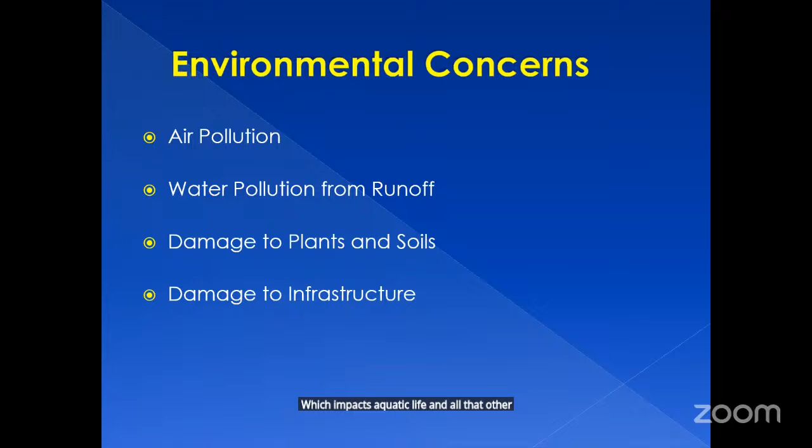Environmental concerns: chlorides, acetates, and abrasives placed on pavements during snow and ice control operations eventually end up in the natural environment. That's a fact. The accumulation of chlorides, acetates, and abrasives poses risks to public health, aquatic ecosystems, water quality, vegetation, and wildlife. Chlorides cause damage to infrastructure. I'm going to have some photos showing all this stuff.

The most common chemical used is sodium chloride, common rock salt. It's the least expensive out there. There are many alternatives, but sodium chloride is the least expensive, and that's what pretty much everybody uses, typically mixed with something else. Other chemicals used either alone or in combination with sodium chloride include calcium chloride, magnesium chloride, very common, and potassium acetate, which you would typically see used at airports because it's non-corrosive. Calcium magnesium acetate is another non-corrosive material, but expensive. Urea, and there's agricultural byproducts, which we will talk about a little bit.

Abrasives are not chemicals, but are used at times to improve traction and friction, trying to make the road like sandpaper. If you've lost it and got away from anti-icing, you can get snowpack on the road. So on hills and intersections, abrasives can improve the friction for vehicles.

Give them a better chance to stop. In the United States, approximately 10 to 25 million tons of sodium chloride is used annually, depending on winter conditions. This is from the National Research Council. I'm sure you can find this on the internet.

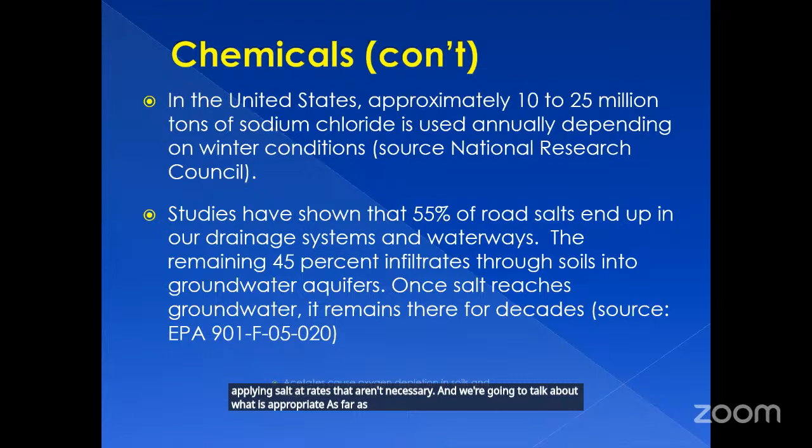Acetates cause oxygen depletion in soils and water. Use of dry abrasives for snow and ice control has very little value other than improving the friction. So if you get snowpack or ice and you want to improve the friction, you can put abrasives down. Others try to cut through that snowpack or ice by applying salt, because now you're in a de-icing situation versus anti-icing, and we're going to get into how much additional salt it takes to de-ice versus anti-ice.

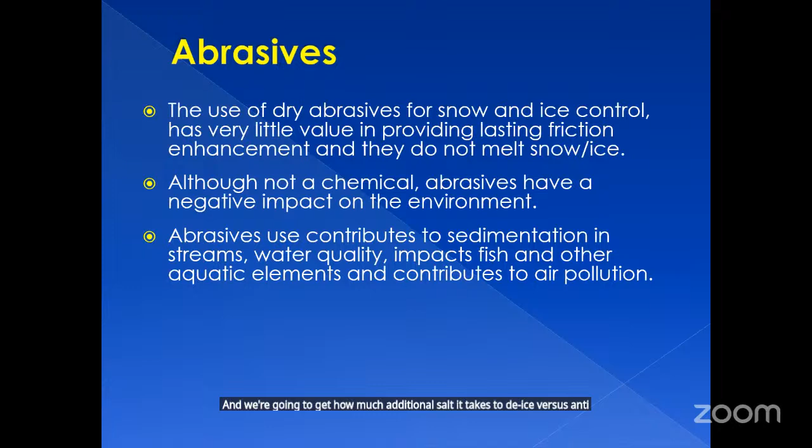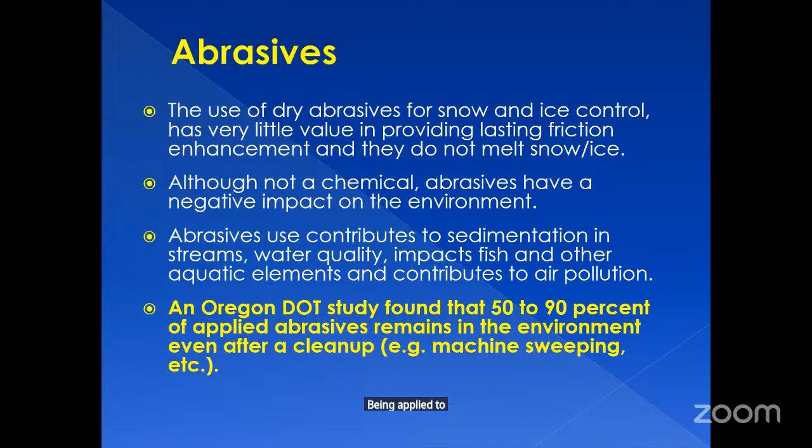We'll get into that. An Oregon DOT study found that 50 to 90% of applied abrasives, this is sand, remains in the environment even after cleanup. That's why if you're near culverts, if you look down in the waterway as you cross over, you often see little sandbars and things like that. A lot of that is from the abrasives applied to roadways. Not as much today, but in the past, abrasives were heavily used.

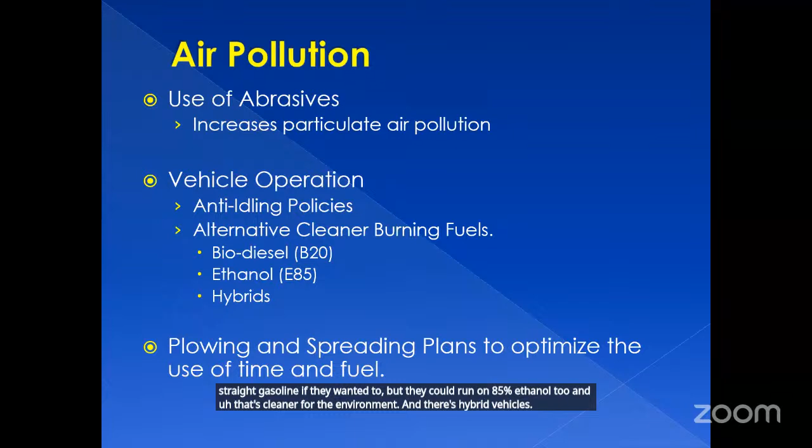Abrasives cause air pollution. There are things we can do to reduce air pollution: anti-idling policies, alternative cleaner burning fuels, use biodiesel, ethanol, E85. When I was with Hamilton, I wrote a green fleet policy, so everything they had to buy had to be something that burned cleaner fuel. We were using a lot of ethanol, which is 85% ethanol and 15% gasoline, and these flex fuel vehicles could run on any amount, they could run on straight gasoline if they wanted, but they could run on 85% ethanol too, and that's cleaner for the environment. There's also hybrid vehicles, and plowing and spreading plans to optimize the use of time and fuel.

Water pollution: a 2009 study by University of Minnesota. This is where we are now, and it's getting worse every single year. If you're driving down the road after a storm, you'll see a lot of the roads will just be white, especially the state highways. And if you look at the shoulders, you'll find loose chlorides that never went into solution. That ends up at some point migrating off into your drainage system and can be very harmful to aquatic life. Now in some cases, you're even getting the effects of tasting it in some of the drinking water. So I kind of covered that.

Other things that are used in salt are anti-caking agents. Some of these anti-caking agents, like Prussian blue and yellow prussiate, actually contain cyanide. There's agricultural byproducts that can be added to salt, which we're going to talk about, because some of these are very, very effective at making liquids last longer and work better, like if you're pre-treating your roads. Sugar beet juice is a very common one. We'll get into that a little bit.

So, equipment washing. For those of you involved in snow and ice control, in the old days you'd pull your trucks in after a storm and just wash them all down. All the salt water would just come out and go find a storm drain. And that's not a good thing.

So when you wash your vehicles, a lot of agencies now are actually putting in vehicle wash stations. You put your vehicle in the wash station, and everything gets recycled. The water gets recycled, doesn't go into the storm drain system. I even think they recapture the salt that gets washed off. Hamilton has a truck wash station, and they allow other towns to come and use it.

Otherwise, you should do things to prevent any water from getting into storm drains, using socks - those big environmental socks, whatever you can get - but it shouldn't be allowed to go into the storm drain system. It's going directly into waterways.

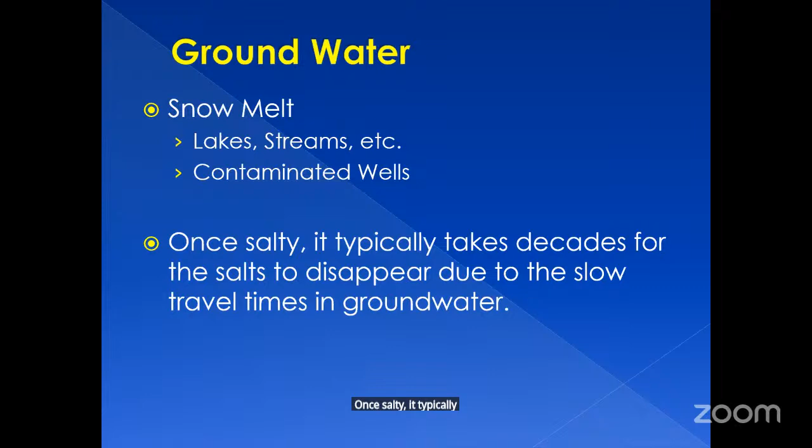Salt solutions can disturb water uptake of roots and cells and leaves. Salt spray can dry out leaves. Most damage occurs within 30 to 50 feet of the road. Susceptibility to damage by salt varies significantly among plant species. So a lot of agencies are finding a way to put in salt tolerant species, but the bottom line is there's still all that salt going over there.

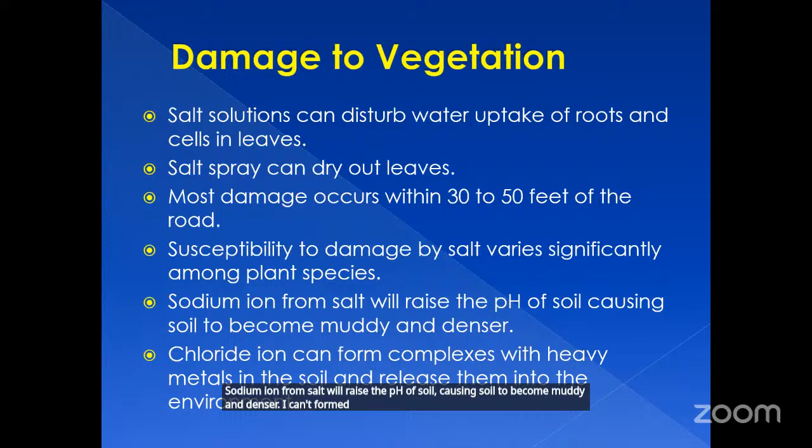A sodium ion from salt will raise the pH of soil, causing soil to become muddy and denser. Chloride ion forms complexes with heavy metals in the soil and releases them into the environment.

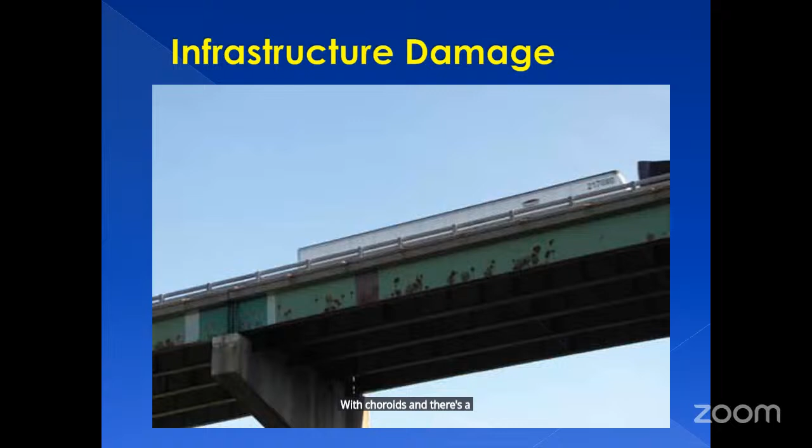Now, infrastructure damage from chlorides - not directly related to water, but this damage to infrastructure is significant with chlorides, and there's a lot of reasons for that. Here's just one example where you can see the bridge paint is rusting, the steel is rusting.

The United States Environmental Protection Agency estimates that for every ton of salt costing $50 - now that number's old, typical salt like pre-treated salt, if you were to buy Clear Lane or something, that's somewhere around $75 a ton if you buy it off a state contract - approximately $750 in damage to infrastructure. So that would be more on the lines of like $1,000 damage, and that includes concrete and vehicles and all those things.

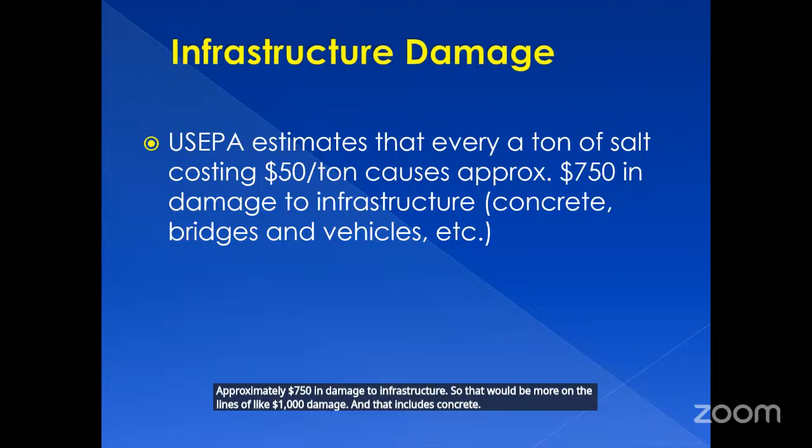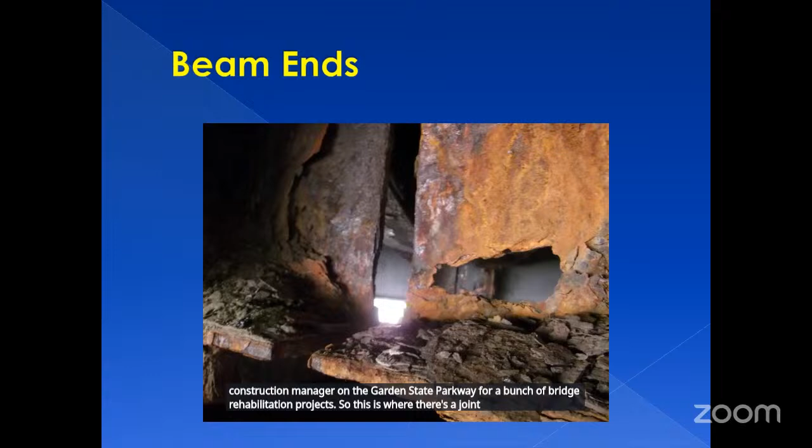Here's a photo I took. I was a construction manager on the Garden State Parkway for a bunch of bridge rehabilitation projects. This is where there's a joint in the bridge, and the joint was not properly sealed or functioning properly, so all the water and chlorides that got on the bridge leached down and got onto these beams. Here's a beam with a hole in it, and you can see the amount of rust and steel that has dropped down onto the flange of the beam.

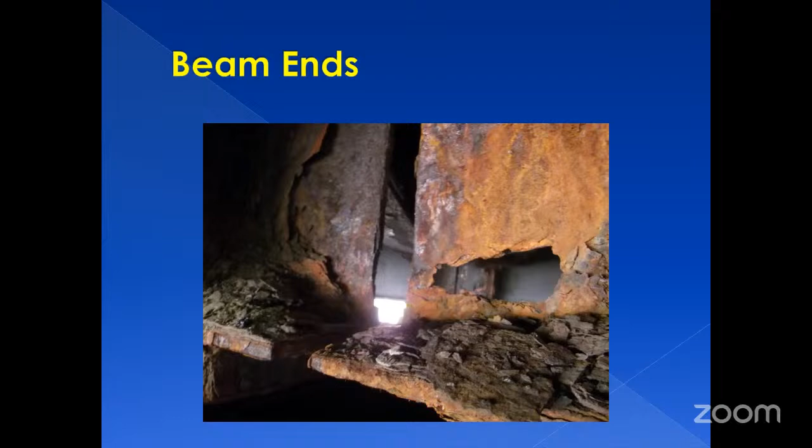What can we do to minimize the environmental impacts of winter operations? Well, you can develop a winter operations management plan. This is where we establish levels of service for different types of roadways, and develop specific route-by-route snow and ice control plowing and spreading plans. If you have a plan to spread your roads at a specific frequency, you can maintain an anti-icing policy throughout the storm. That means having a route-by-route plowing and spreading plan in place, so everybody knows exactly what they're expected to do and how long it's going to take.

Incorporate technologies such as automated vehicle location systems, geographic information systems, and infrared mobile thermometers. Infrared mobile thermometers tell you what the pavement temperature is, and that is a critical piece of information for you to use if you're going to maintain an anti-icing policy.

For example, when I was with Hamilton Township, we had infrared mobile thermometers and pavement temperature specific weather forecasts, and other agencies were out there spreading material down for a storm. We didn't spread 1 grain of salt. The reason was because we knew that the pavement temperatures were above freezing and weren't going to go below freezing. So we didn't do anything. The snow landed on the road, the snow melted, and that was it. We didn't apply a single grain of salt. And that happened more than once.

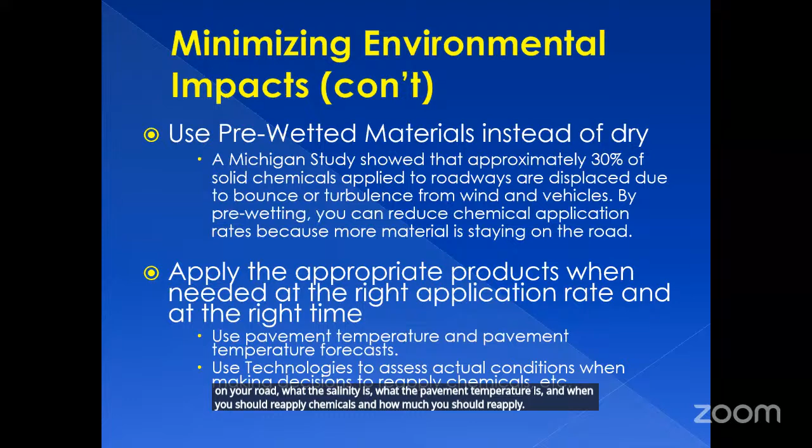Monitor operations and application rates. When I started with the township, I was following a truck and estimated they were putting down more than 800 pounds per lane mile of salt. There were reasons for that: either the driver felt more was better and he had control, more was better, and also the equipment wasn't properly calibrated.

So calibration is very, very important. Make sure you calibrate your spreaders. If you want to put down 300 pounds per lane mile, you're going to put down 300 pounds per lane mile, not 800 pounds per lane mile or 100 pounds per lane mile.

Calibration is extremely important. We're going to talk a little bit about maintenance decision support systems. This takes some of the decisions and makes them more systematic and consistent. It can always be changed, but it's a system that gives you guidance based on the information available, whether weather forecasts, precipitation intensity, pavement temperature, etc. As for equipment, use state-of-the-art spreader controls.

There are spreaders out there, and most of these spreaders are now very intelligent. They collect and store the data—application rates and all those things—and you can get access to that data through various means. Zero velocity spreaders have the actual spreader part lower to the road, which minimizes bounce.

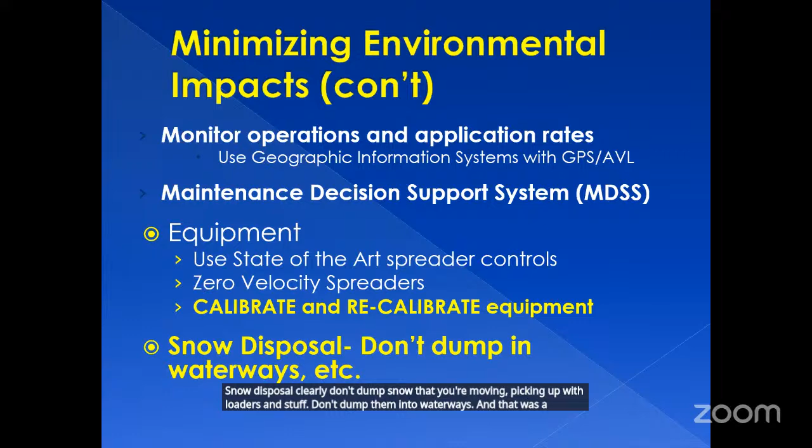Minimize the use of abrasives. Abrasives have to be in your toolbox, but there's no reason to use them unless it's to create a sandpaper situation—typically on hills where you're no longer in an anti-icing situation and you've got pack or ice. You try to improve friction, but abrasives have no melting ability and should not be used very often.

Anti-icing, extremely important. That's what everybody should be doing.

Housekeeping—washing equipment, already covered that. Make sure that you don't allow the wash runoff from your washing activities to go into the storm drains.

Salt storage—make sure your salt's covered, and make sure there's doors or shields on the front so salt can't migrate out of the building.

Personnel training is extremely important. For those of you in the industry, there are many training certification programs out there—you can go through SIMA, the Snow and Ice Management Association, or the American Public Works Association, which has a snow supervisor certification program. Your staff gets trained in how they should handle snow and ice control operations and what's the most effective way to do it. There's nothing better than having your staff certified.

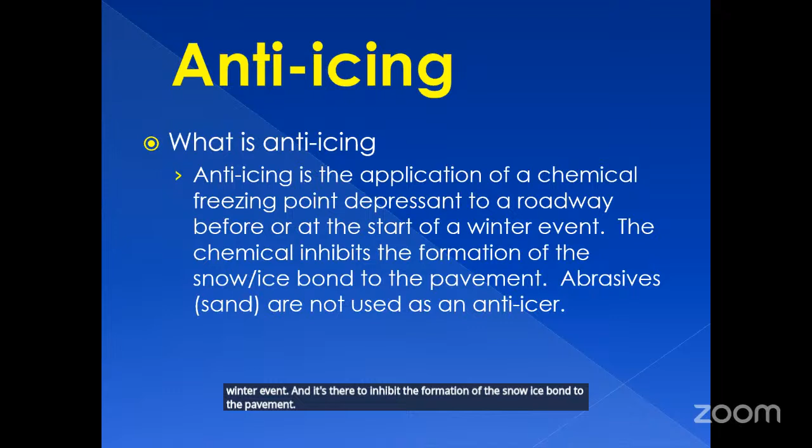So what is anti-icing? Anti-icing is the application of a chemical freezing point depressant to a roadway before or at the start of a winter event, to inhibit the formation of the snow-ice bond to the pavement. That's what everybody should be doing.

Anti-icing prevents the snow and ice from bonding to the pavement. It's a proactive approach. De-icing is applying chemical after you already have snowpack and ice, so it's a reactive thing. Studies have shown that it can take 4 to 8 times more salt to de-ice than anti-ice.

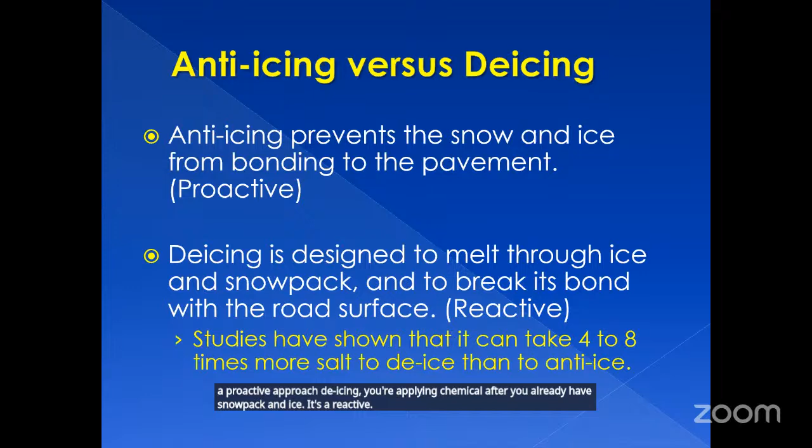Anti-icing can provide a higher level of service, keep snow in a plowable condition, and can provide bare pavement during the storm. At a minimum, anti-icing results in achieving bare pavement at the fastest possible rate at the end of a storm. So if you're anti-icing, once the storm's over all you've got to do is come out there with your plows and push it off.

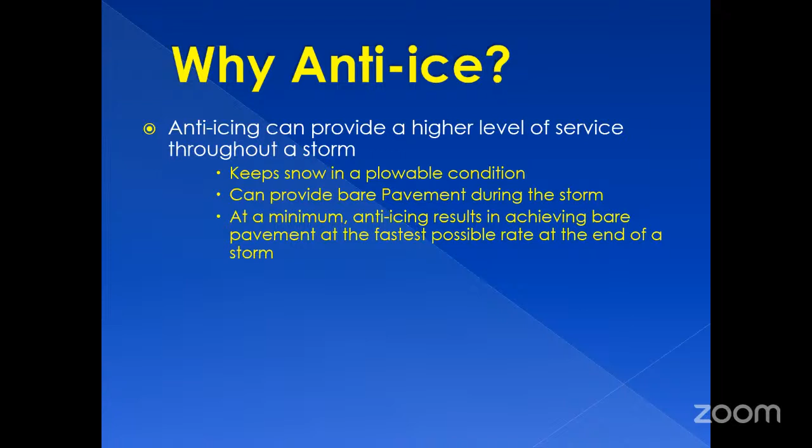It's a very, very good thing. And here's that cost benefit of 11 to 1. These aren't my numbers, this is easily accessible over the internet.

Anti-icing with liquids. So just about everyone is using liquid applications, and they pre-treat their roads ahead of a storm. You can either use salt brine or salt brine blended with other chemicals. Roads, bridges, hills, critical intersections are all great places to do this anti-icing with liquids.

An important part about this is clearly knowing what the weather forecast is, because you don't want to anti-ice pre-treat the roads ahead of a storm if the storm's going to start out as rain, because it's just going to wash away. You don't want to do this if there's just a low probability of snow and ice.

So there's a lot of things to look at here, but it is your first spread. It's going to save you if you do this anti-icing, applying before the storm. It's not critical to have your staff in immediately before the storm starts, because you've already got your first spread down. So it's also an insurance policy, and it can absolutely cut down on the amount of overtime involved.

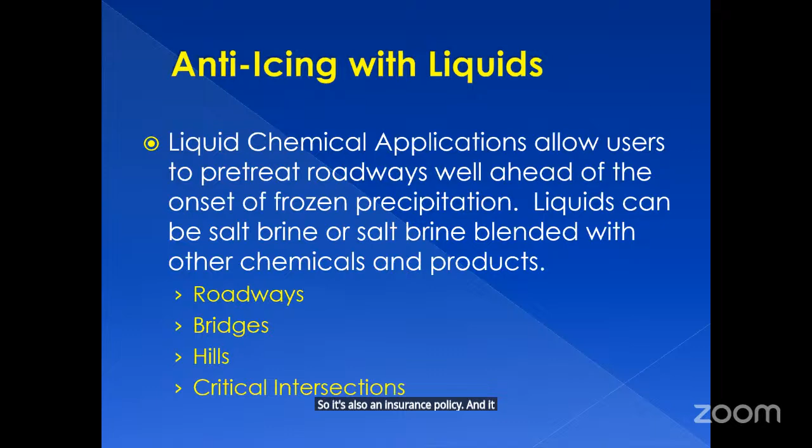So liquids that you can put down are sodium chloride, calcium chloride, magnesium chloride. I've also used potassium acetate when I was at the state doing some research. And then agricultural byproducts, such as from sugar beet and corn, are also used.

And they act as cryoprotectants, these agricultural byproducts, because although they have no melting ability, when you put your brine down they help the brine stay on the road longer, and slow down the formation of ice crystals in the liquid as the temperatures drop and the brine gets diluted. So it's a money saver, it improves performance, and it's a natural anti-corrosive.

Sodium chloride has become the liquid brine of choice for pre-treating highways and roads due to availability and cost. And as for mixing, I'll get into that a little bit, but you can mix chemicals with your brine, like calcium chloride and magnesium chloride, to provide a lower freezing point.

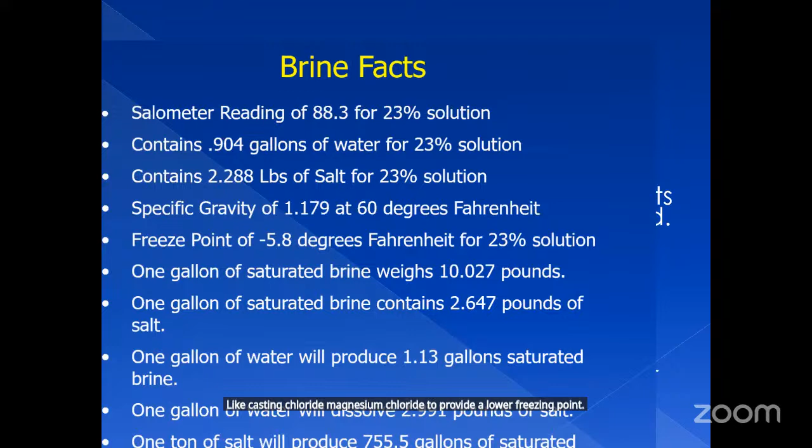So just some brine facts. I'm not going to go over too much of this stuff here, it's just for your information only.

Pre-wetting accelerates solids going into solution. So if you put down salt in a storm where the temperature's 20 degrees and you're just using plain salt, for example, it's going to take a long time for that to go into solution because of the coldness, and when you've got cold air, you've got dry air. If you pre-wet those solids, that acts as an accelerant to help get the salt into solution and make it work. Salt, as everyone should know, does absolutely nothing until it becomes a liquid.

So the salt just sitting on the road does nothing, it's got to become a liquid. Pre-wetting can significantly reduce chemical application rates because more salt is staying on the road, and because it's going into solution quicker.

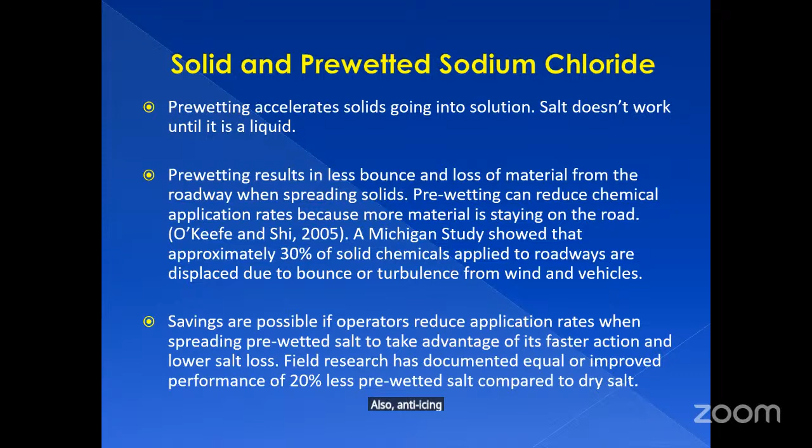Also, anti-icing has been proven to significantly reduce the amounts of accidents involved in snow and ice control.

Technologies and regulations: electronic ground speed controlled spreaders. So if you're riding down the road applying 300 pounds per lane mile, and you slow down or speed up, the application is automatically adjusted based on your speed.

Zero velocity spreaders, talked about that earlier - it's where the spreader is actually closer to the road, so you get lower, less bounce. A lot of agencies are also using rubber plow blades.

Recycling equipment, wash water, covered that. Not going to get into snow fences, I could be here for an hour just talking about that.

Anybody who knows anything about snow fences should know that the fence itself should not be sitting on the ground - it should be roughly 6 to 8 inches off the ground. There have been studies done to show that that's the best way to have drifting stay near the snow fence and not actually blow out closer to the road.

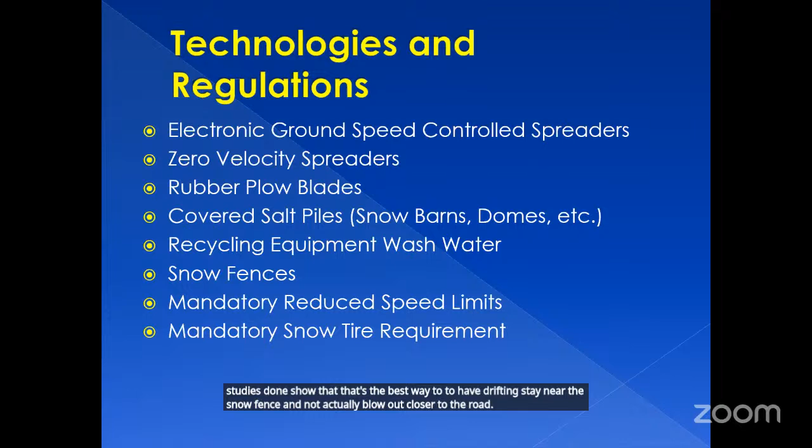Some agencies, I think Massachusetts was one, have no salt zones where you can't apply salt, so you have to look at different types of alternatives. There are different chemicals that are decent for the environment.

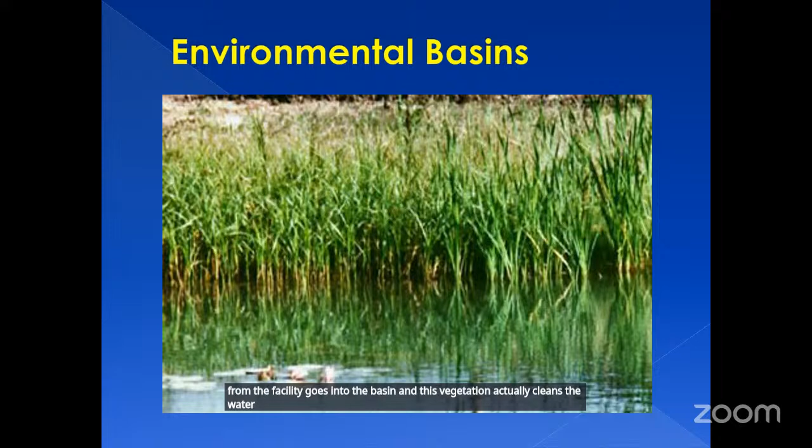Decision making is extremely important, knowing what the weather forecasts are: start and end times, pavement, ambient, and dew point temperatures, intensity, precipitation, the type of precipitation, and what you're going to do with winds.

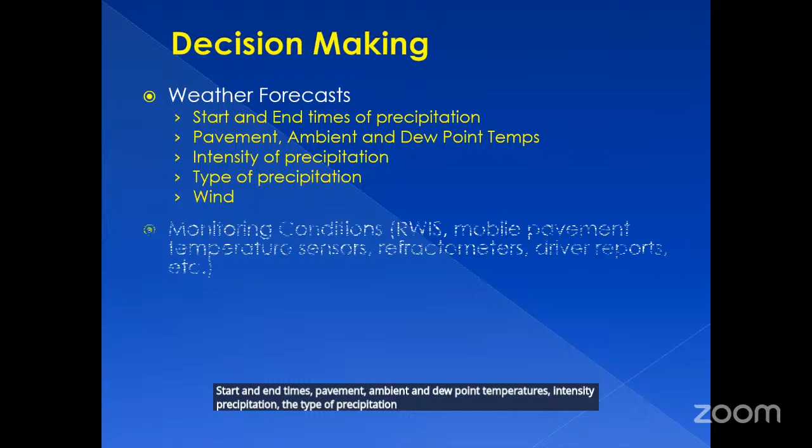Monitoring the conditions - if you're a state, you may have access to road weather information systems. If not, or if you're everybody, you should have mobile pavement temperature sensors in your vehicles so you can monitor what the pavement temperatures are. There's no reason to put chemicals down if the pavement temperature is 40 degrees.

Refractometers - that's something we're going to get into a little bit, how you can use refractometers to help you decide when to reapply chemicals. You take a couple drops of liquid off the roadway, put it in the refractometer, and it'll tell you what the salinity of the brine is. If you know that and the pavement temperature, that gives you an intelligent way of determining whether to reapply chemicals. Sounds a little complicated.

It's not. Every one of my crews in Hamilton had a refractometer. They cost a few hundred dollars a piece.

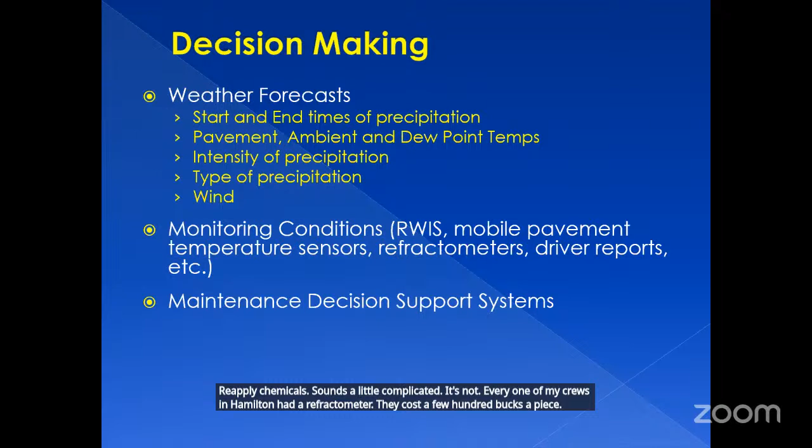Maintenance decision support systems - that's a system where all this information gets pulled in, and then it will recommend to you what you should do, as far as how much you should put down, the material you should put down, that type of thing. It's based on the storm event type, precipitation intensity, all those things.

Everybody should know exactly what they're expected to do - how much material to put down, all those things. You shouldn't be having a truck out there just bombs away. Everybody should know here's what is expected.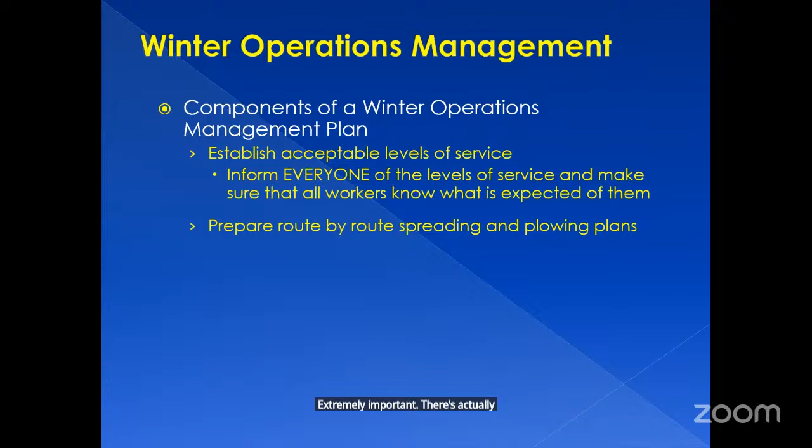Prepare route by route spreading and plowing plans - went over that a little bit. Extremely important, there's actually software out there now. I think some of the companies, like the waste removal companies, do that so they can get their waste picked up as quickly as possible, so they have optimized the routes that these trucks travel.

We can do the same thing for spreading and plowing, and it can be, and it does get set up, so that when vehicles are down and not available, it adjusts the plan automatically based on what equipment you have available and the size of the trucks, etc.

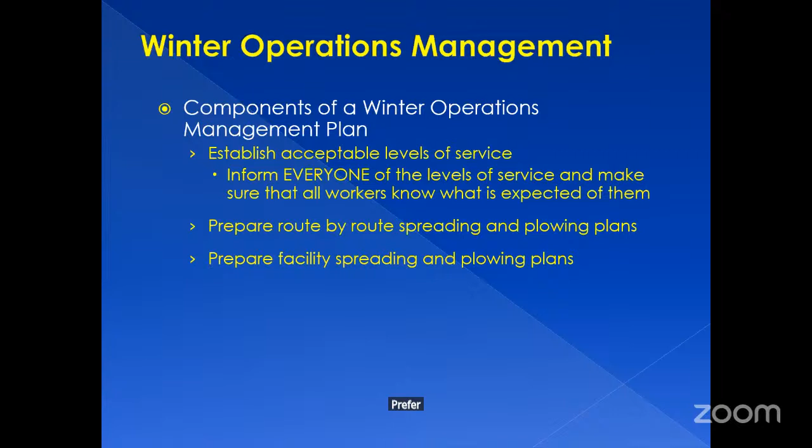Prepare facility spreading and plowing plans - this is to deal with parking lots and sidewalks and all that other stuff.

Determine resource requirements - this is where it gets a little complicated. When you're determining what you need to really effectively do snow and ice control, how much equipment and that type of stuff. You've obviously got to get money from your town or state to buy stuff. I could spend hours just talking about this, but it's important to do that - what do you need to get the job done?

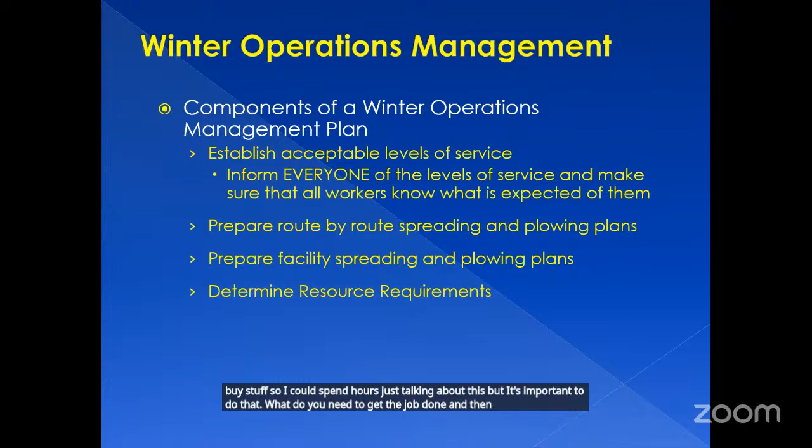And then echo that to upper management. If you can't get the equipment, then you have to adjust your plan so that you do it with whatever you have available.

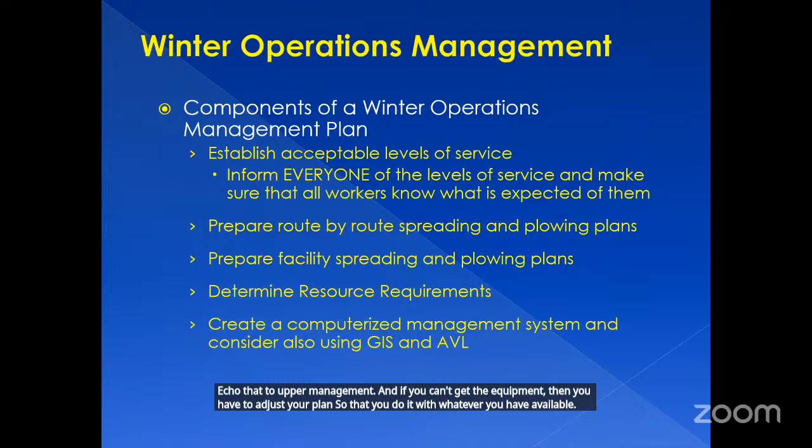A computerized maintenance management system, and consider also using GIS and AVL. Extremely important as far as I'm concerned. I'm going to show you some photos of stuff in a second.

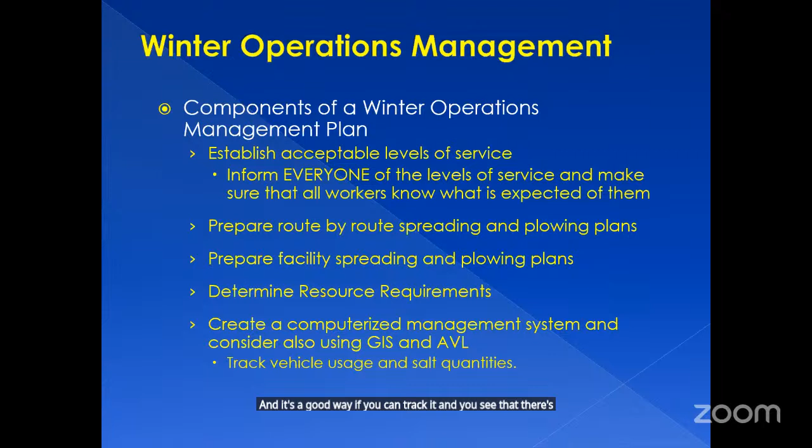Track vehicle usage and salt quantities - it's good to know where your vehicles are, what they're going to be doing, and how much material they're actually putting down, and record all that information. It's a good way, if you can track it and you see that there are certain vehicles putting way too much material down, you're able to talk to the driver and educate them, that type of thing.

Establish a communication system.

Use an operations center. I don't know how many people are doing that, but I know pretty much all the states use that, where they have people staffing a center and they're able to track operations and what's going on.

Decision-making tools, forecast, extremely important. If you have access to RWIS, road weather information system, that's an automated weather station out on the road. There's pavement temperatures, wind speed, precipitation intensity, all of that stuff is being captured. And if you're a town where everybody's paying taxes, you can often convince the state to give you access to their road weather information system. Now it's not your road, but you can still see what the weather's doing there.

You can use the pavement temperature stuff, but obviously everything as far as how much chemicals are there and things is really not going to be useful. But you can reach out to your state and very well could get access to RWIS. I know when I went with Hamilton after the state, I had access to the NJDOT RWIS sites.

Equipment and personnel readiness, that should happen year round. Public relations and public education, very important that the public knows what you're going to be doing. Pre-storm strategy meetings and post-storm strategy assessments, a requirement in the plan.

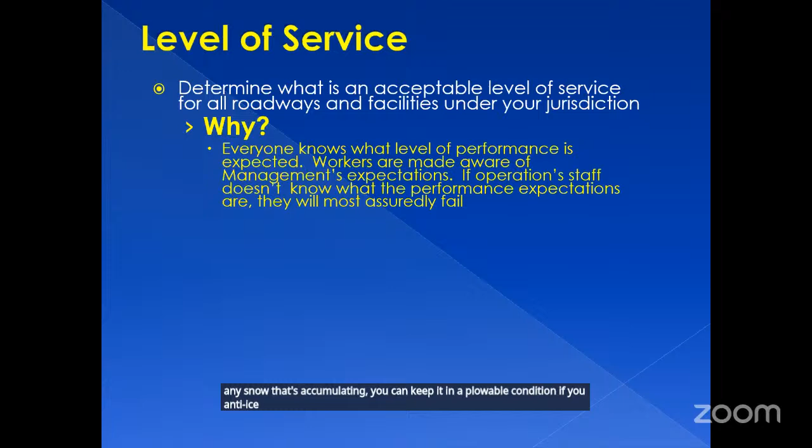Levels of service. So what's expected, and this is where everybody needs to know. There should be primary roads and secondary roads. The primaries, which get the most traffic, are obviously the most important. So what is your level of service for primaries? Is it to try to maintain a bare pavement throughout the storm? Sometimes you can, sometimes you can't, but at the minimum, any snow that's accumulating, you can keep it in a plowable condition if you anti-ice. But it's important everybody knows the levels of service for different roads.

So roads can be classified in many ways. In my town, we did primary and secondary. The secondary were the neighborhood roads, the primary were the main roads, and often the main roads going into developments, so you easily could get emergency vehicles in and out.

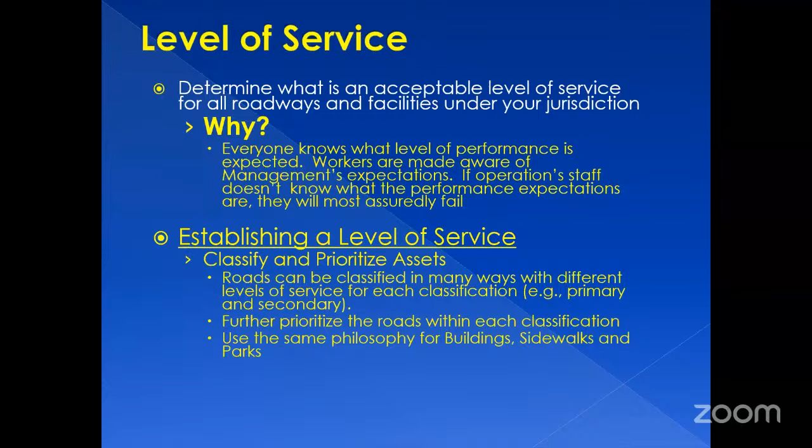And you could use that same philosophy for buildings, sidewalks, and parks. So obviously the mayor's office is going to be a priority over a park. And that was just an example of that.

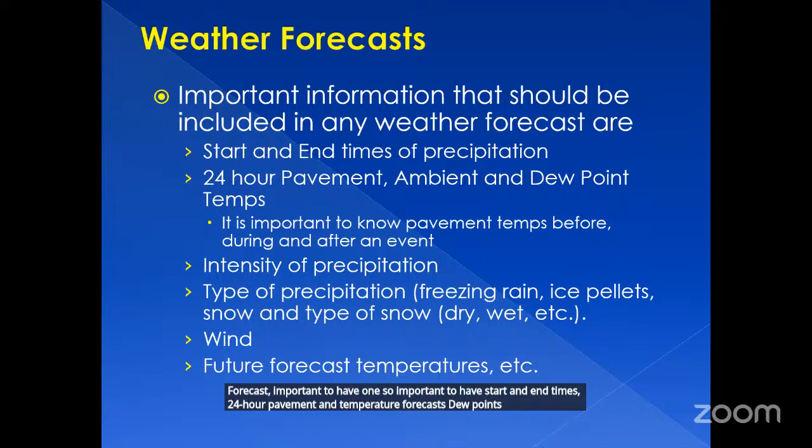Forecast, important to have start and end times, 24-hour pavement temperature forecasts, dew points. You want to know if there's going to be condensation forming on your bridge decks, and what's going to happen after the storm, or what the temperature's going to do. So here's an example of a 24-hour, or close to that, pavement temperature forecast, which includes ambient pavement temperature, all those types of things.

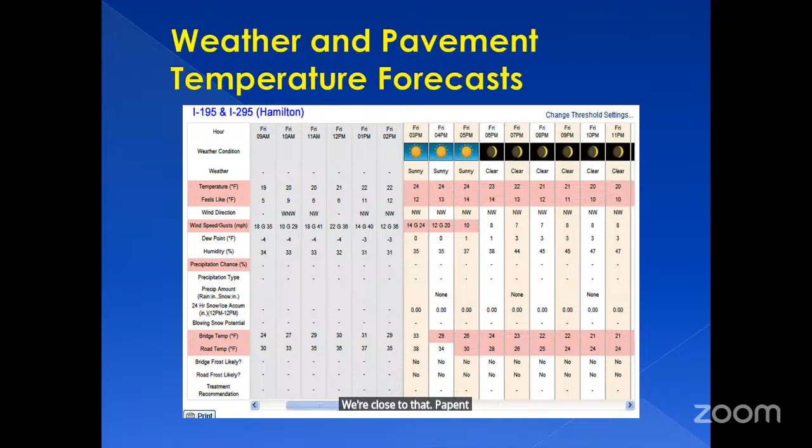How do you decide when to apply or reapply chemicals? For many it's just intuitive. You apply chemicals and then you come back out and say, okay, it's been a little while, let me put more down. That's intuitive. Some people are really good at that, others aren't. Lapsed time since the last application: if you apply salt and now a certain amount of time has gone by, you could just say okay, it's time to go back down and reapply. Again, intuitive.

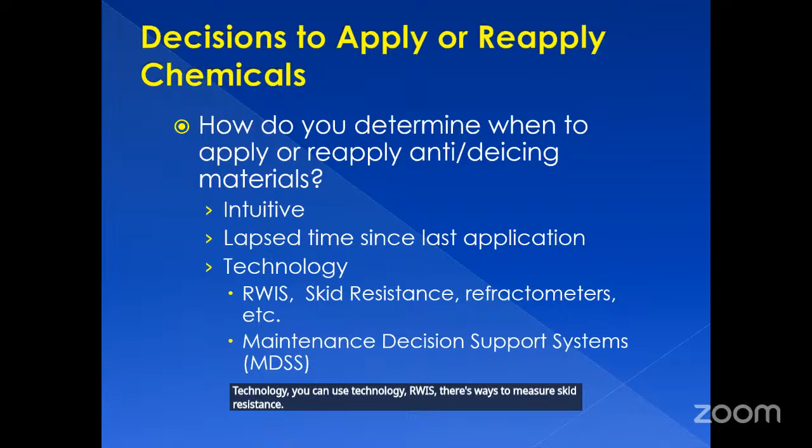Technology, you can use technology. RWIS, there's ways to measure skid resistance, refractometers, which I talked about a little bit, and maintenance decision support systems.

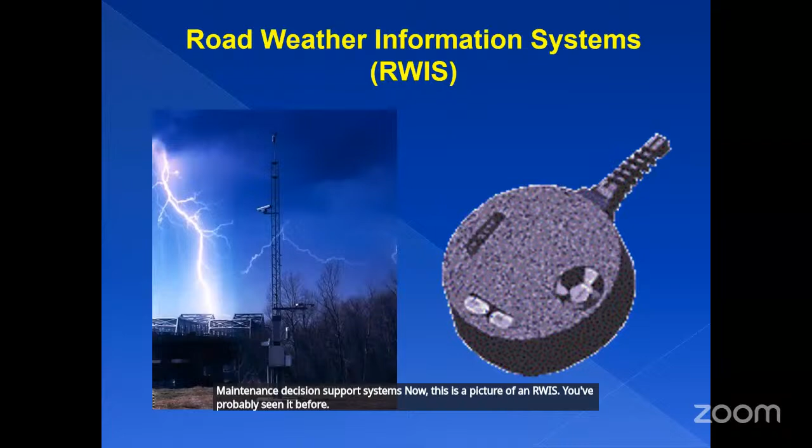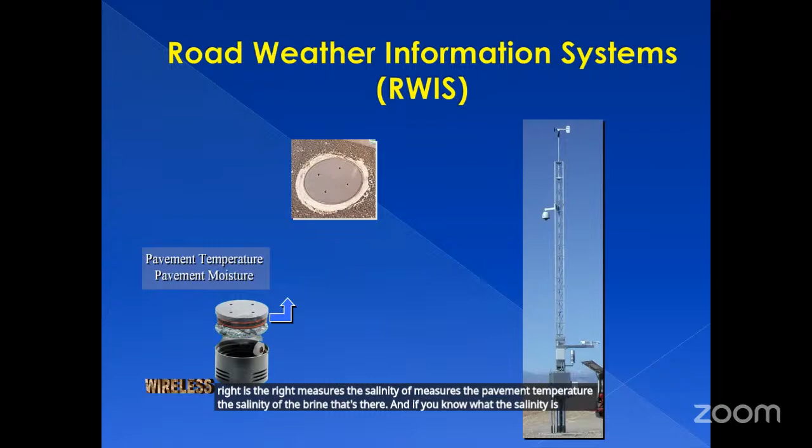Now, this is a picture of an RWIS. You've probably seen it before. You got a weather tower with a weather station. Here the sensor on the right measures the pavement temperature and the salinity of the brine that's there. If you know what the salinity is and what the pavement temperature is, you can determine if you need to reapply chemicals.

I'm going to say this again: there's nothing more important to you if you're involved in snow and ice control operations than knowing what the pavement temperature is. If it's below freezing and you've got precipitation, you're going to need to do something. If it's not below freezing, any material you put down is a waste—the snow's going to melt, everything gets diluted, it just washes away. So it's very, very important to know the surface temperature. These devices are relatively inexpensive. Every vehicle in Hamilton, in my town—pickup trucks, loaders we use for plowing, dump trucks—all of them had these devices in them.

This is a refractometer. If you want to see what the salinity is of the brine on the road, you just pull over, take an eyedropper full of material, put it in that little cup, close the lid, push a button, and it will tell you what the salinity is. Knowing the salinity and the pavement temperature, you can determine whether you need to reapply chemicals.

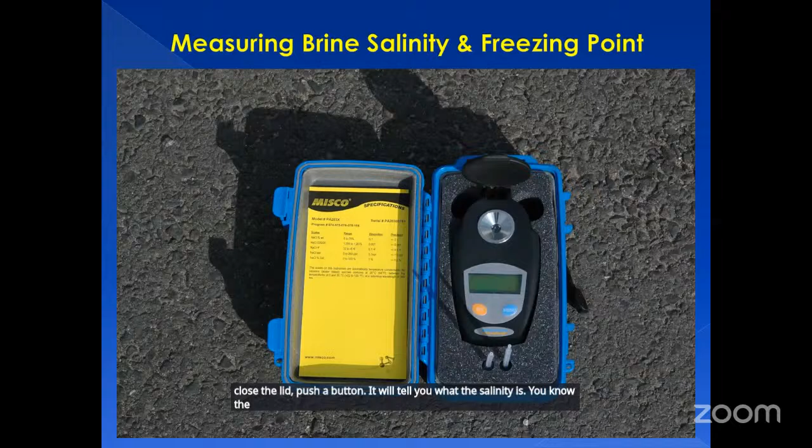This is a skid resistance device. I don't know anybody that uses this, but you can also determine when to reapply chemicals based on the skid resistance.

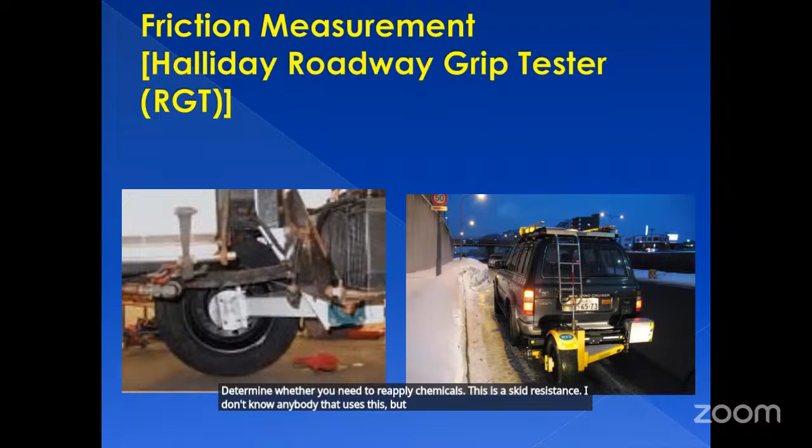Maintenance decision support systems take your forecast information and information you've been inputting, and tell you what you should do, or suggest what you should do.

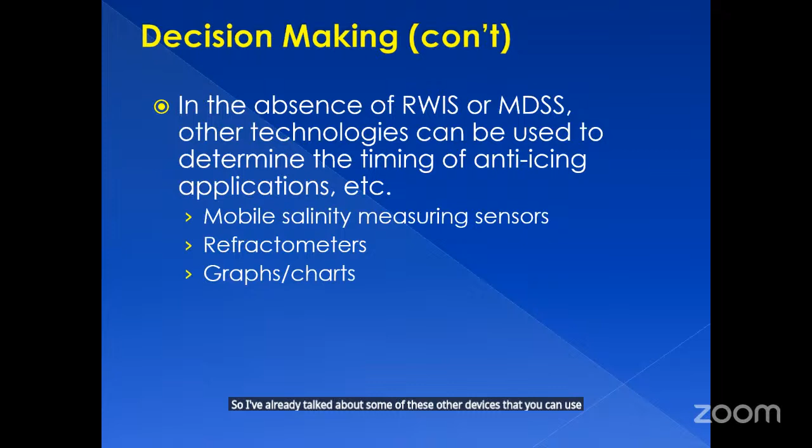I've already talked about some of these other devices that help you determine when to reapply chemicals and take it out of pure intuitiveness. There's all types of technology out there. Anti-ice will work until the eutectic temperature of the solution meets the pavement surface temperature. So when you anti-ice, it's important to know the salinity and the pavement temperature, because if it gets too diluted, it's going to refreeze. Refreezing occurs when the ice control chemical dilutes and melting stops at a given surface temperature.

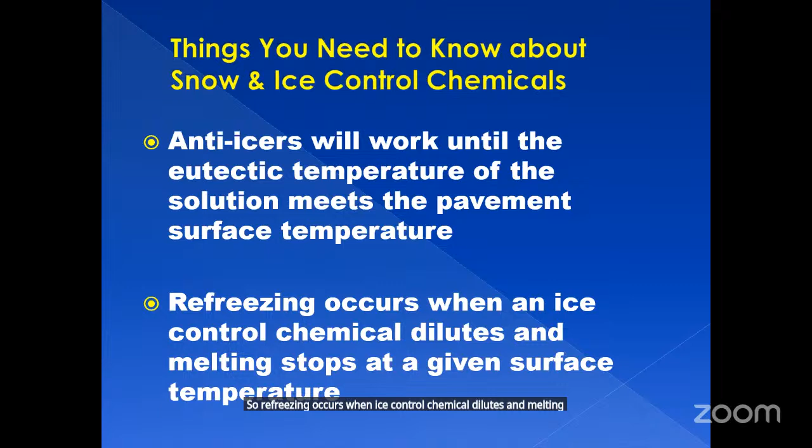Again, some of this is technical and I could go on for a long time. I'm absolutely open to it if anybody needs to contact me later about this.

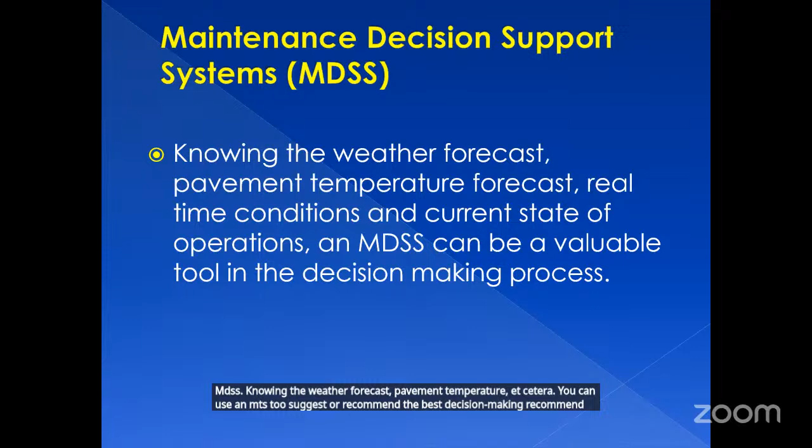MDSS uses knowledge of the weather forecast, pavement temperature, etc., to suggest or recommend the best decisions you should be making with regards to the storm. You can also use graphs to determine when to reapply chemicals. I've used this before we got into major technology, and it gets you away from the intuitive stuff and gives you a more educated way to make a decision.

Salt brine application guidelines: you can use MDSS to determine the type of storm expected, what the pavement temperatures are going to be, and what you should do.

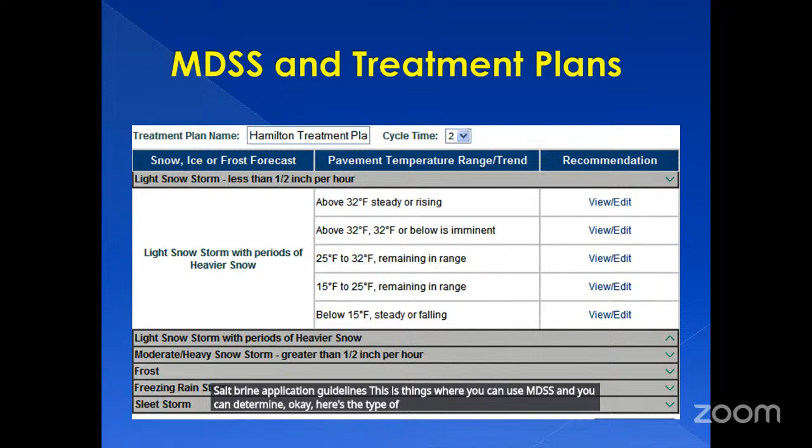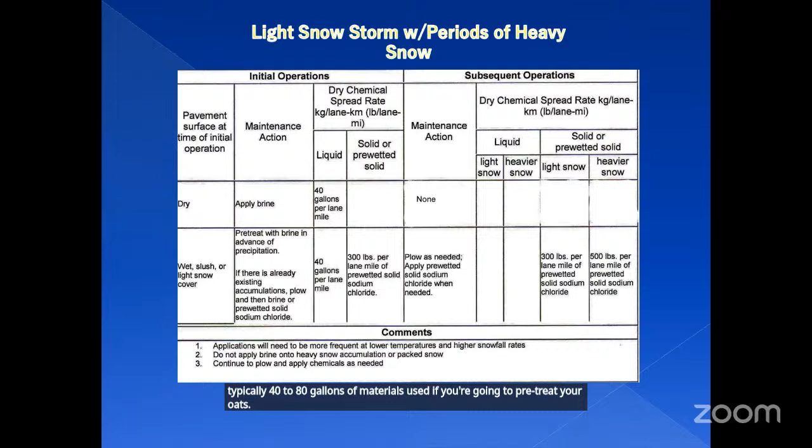Application rates depend on your equipment, but typically 40 to 80 gallons of material is used if you're going to pre-treat your roads. There are different rates depending on the storm type, as far as reapplying solids after the brine. Here's another example of a weather forecast with pavement temperatures, etc.

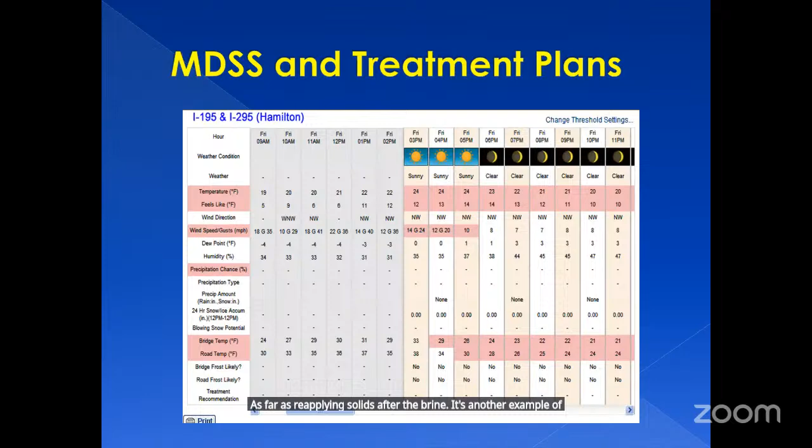Equipment readiness—I won't go through this in too much detail, but spreader calibration is extremely important. You shouldn't be putting down 800 pounds per mile when you really only want to put down 300. This is old information, but Hamilton Township calibrated all of its spreading equipment twice during the 2004-2005 winter. That winter, Hamilton received more events and 6 inches more snow than the previous winter, and we saved $160,000 in salt compared to that previous winter. There are all kinds of other factors that go into this, but this is a fact.

In winter operations in 2005, we developed this winter operation geographical information system. This system allows us to track our progress in fighting winter events. You can see every single plow that's out there on the roads—whether the plow is in the up or down position, how much liquids and solids they're applying, what the ambient temperature is, what the pavement temperature is. Very important in my opinion, and there are all kinds of ways to do this at a relatively minimal cost.

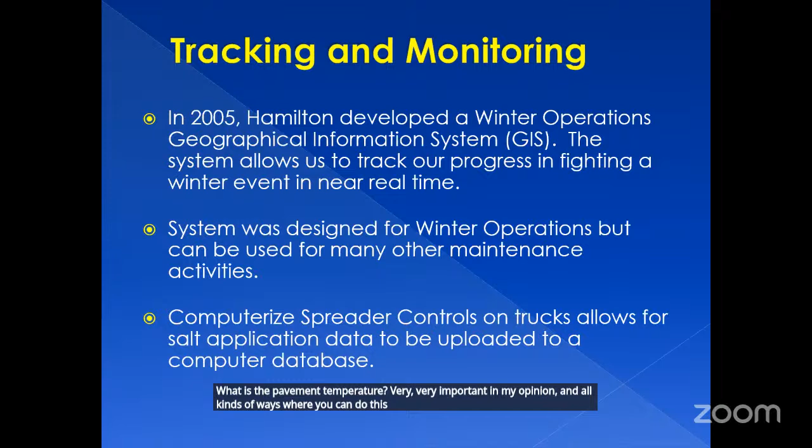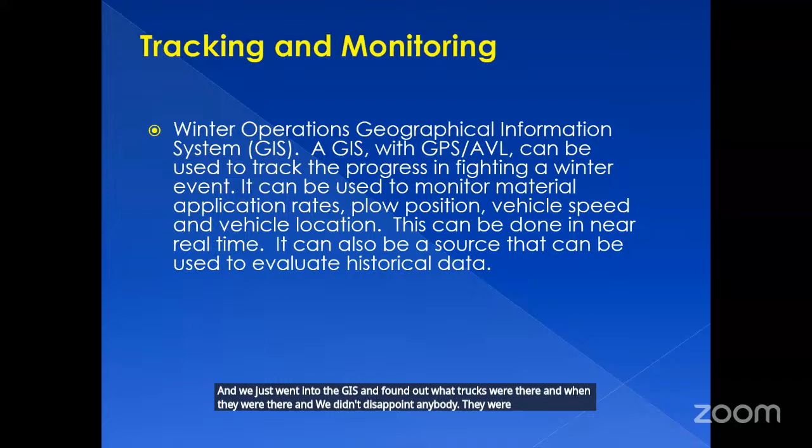So it also tells you vehicle speed and all that other stuff, and gives you a breadcrumb trail of what the vehicle did afterwards. We had a complaint, there were 13 mailboxes taken down on one road, and we just went into the GIS and found out what trucks were there and when they were there. We didn't discipline anybody, they were just going too fast during a heavy snow, so we had a little chat with them and that was it. But you can get all kinds of information from this.

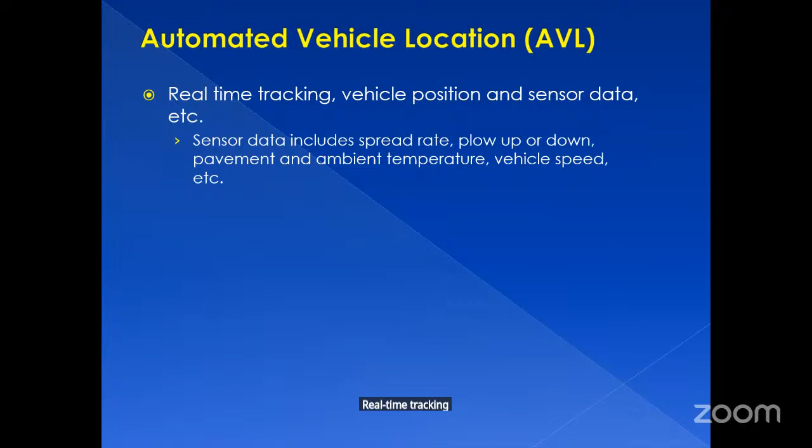Real-time tracking, all kinds of sensor data. You can also set red flags up, so if any truck spreads over a certain amount of material, it will notify you that this truck is spreading 500 pounds per lane mile. And if they're going faster than they should, it can also alert you of that.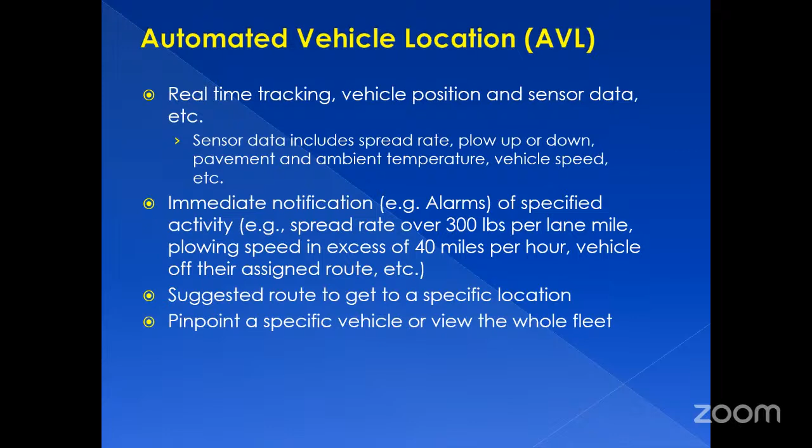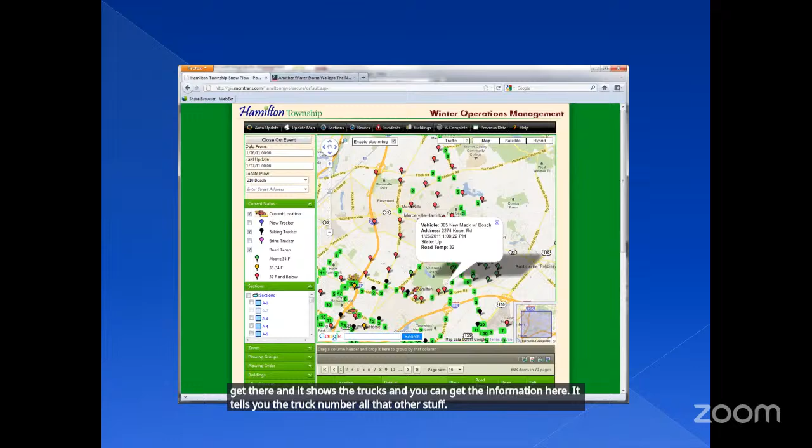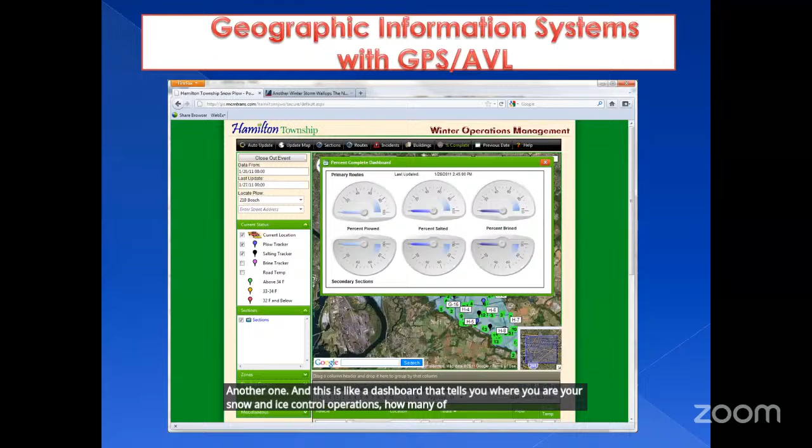This is Hamilton's Operations Center. These are just some maps that you get there, and it shows the trucks, and you can get information here. It tells you the truck number, all that other stuff. And this is like a dashboard that tells you where you are in your snow and ice control operations, how many of your roads have been spread, how many have been plowed, and what's remaining to do.

And then training, very, very important. I love snow rodeos. This is at our ecological facility that we use to train trucks on. In the summer, new employees can come in here and we spread mulch out and they can plow the mulch.

So this is in the old days, you see the wheels on this plow, it's an old plow. Today, the plow just rests straight on the roadway. That's what everybody should be doing. The plow should be directly on the road, removing as much dilution potential as possible. That'll keep you in an anti-icing situation and reduce the amount of salt you use.

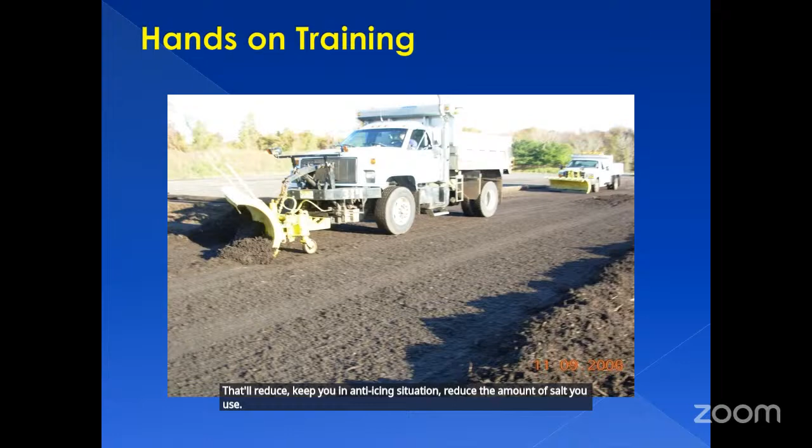Snow rodeos are an absolute blast. I don't know if you've ever done any, but this is an obstacle course where the vehicle goes through the cones, and you have a barrel push at the end, and there's all kinds of stuff.

So you can reduce, if you follow an optimal plan, the amount of time it takes you to spread and plow your roads. If you have an optimum roadway spreading and plowing plan, you can significantly reduce the amount of time it takes to get the work done. Like I said at the top, it was taking 3 hours or more to spread all primary roads in Hamilton. By following a detailed plan, we cut it to an hour and a half.

Significant. And if you can follow those cycles, it typically means you're going to be using less salt, because you're not getting that buildup of snow, and you're keeping it in a plowable condition. Plowing also saw a significant difference, from 10 to 12 hours at the plowing point, we cut it to almost 6. Secondary roads, prior to the plan, it was taking 36 hours or more to plow all of the secondary township roads. Using a plowing plan, everything was done within 24 hours. This is the neighborhood roads.

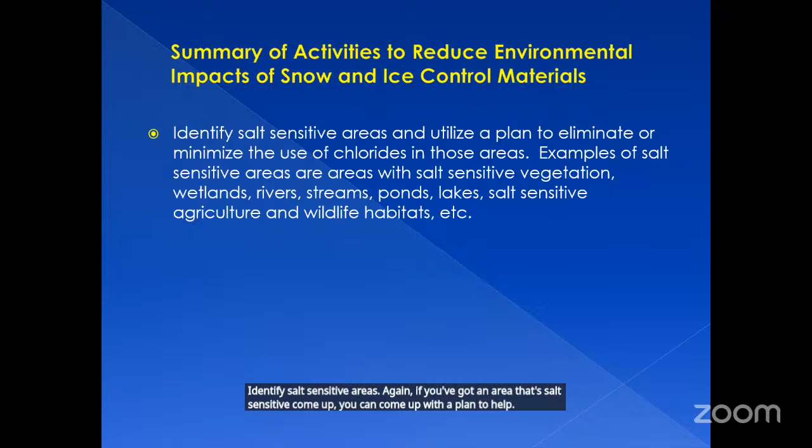Identify salt-sensitive areas. Again, if you've got an area that's salt sensitive, you can come up with a plan to help minimize the effects there, either by using a different chemical or by not applying anything. Alternative environmentally friendly chemicals are out there.

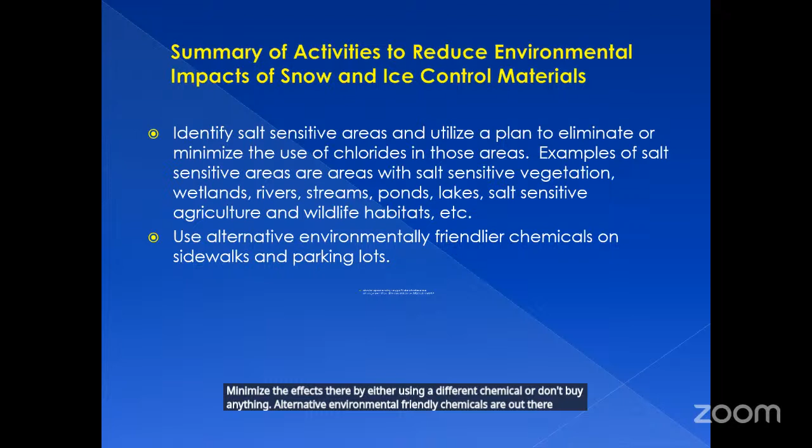Winter maintenance management plan. If you ever want to see this, you can either call me or call Hamilton, and I'm sure they would be more than happy to demonstrate their system. It is state of the art. It's a great system. I'm not taking full credit for it, but it was me.

I brought liquid applications to the state and to the town, and I was also the key person in setting up this GPS, AVL, and GIS at Hamilton. It's something to see, and I'm sure they're more than happy to showcase it for you, especially during a winter event. You just come in and stop by to watch, go to their operations center.

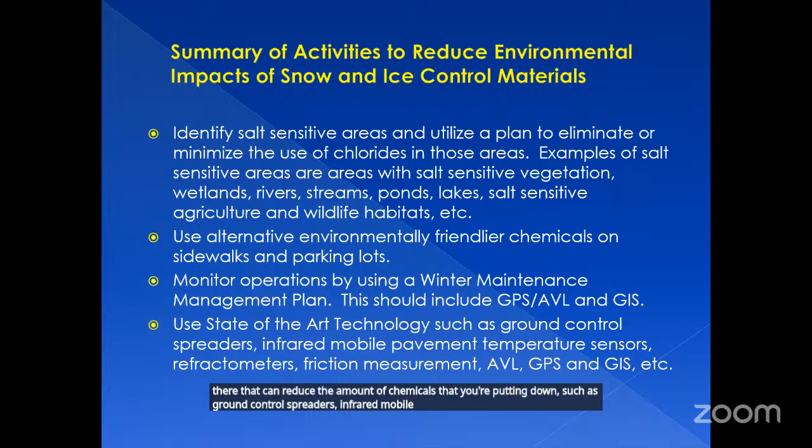I can't emphasize this enough. There's so much state-of-the-art technology out there that can reduce the amount of chemicals you're putting down, such as ground control spreaders, infrared mobile pavement temperature sensors, refractometers that I talked about, etc.

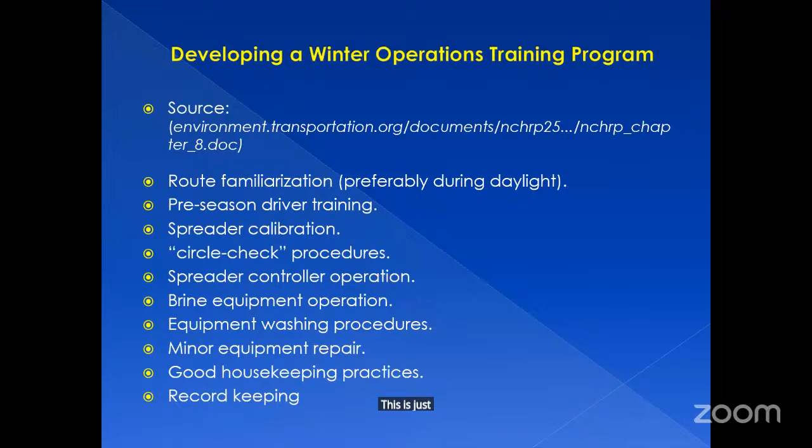This is just a quick overview of things we already covered. Your staff should know how to calibrate equipment, unless you let your mechanics and garage do that. I can get into brine concentrations, but the optimum brine concentration is 23.3% salt by water. Here's just a summary of training programs you should consider doing.

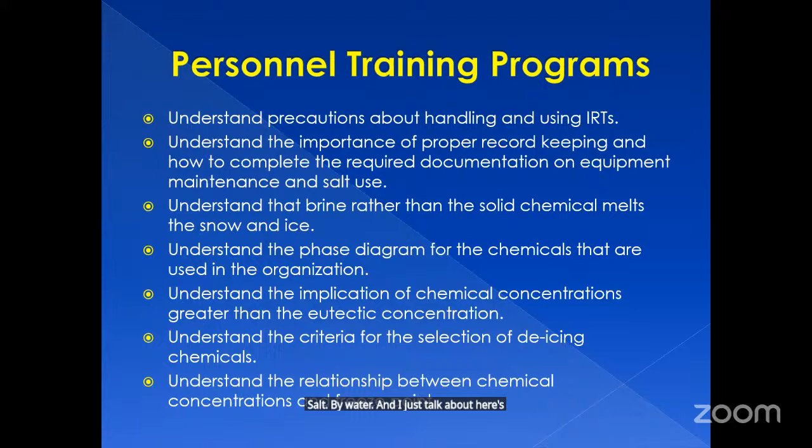Understand the principle of refreezing. Again, this is important too. So if you're plowing your parking lots, make sure you have a plan on where you're going to store the snow. Otherwise, the snow melt is just going to go across the pavement and refreeze at a point. So if you store your salt and snow in the right spots, it can set up when it melts and just go into a storm drain.

Store your plowed snow into a storm drain, and you'll minimize the adverse effect of refreeze and the amount of chemicals you have to put down. If it's not coming across the roadway or the pavement of the parking lot, and it doesn't refreeze, you're not going to have to put chemicals down.

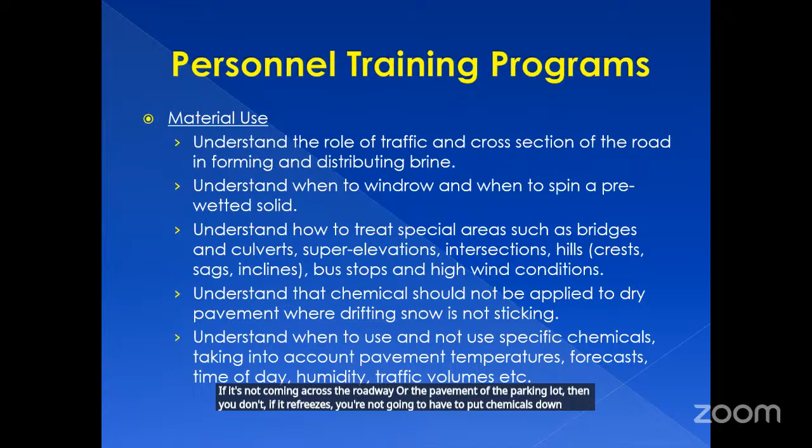So again, a big summary. Salt management principles of ice formation. Know how ice forms on roadways, especially how it deals with bridge decks, because the underside is exposed to the air. How bridges can freeze beforehand—they're an excellent source of pre-treating. If you don't need to pre-treat the whole road system, maybe you just have to pre-treat your bridge decks.

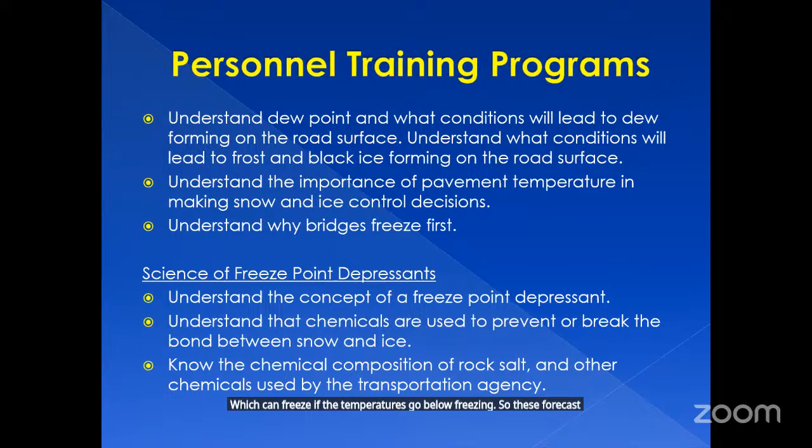Understand the science of freeze point depressants. How does brine work? That type of thing—this is all stuff you can get out of all these great training programs. Understand how frost and black ice forms due to dew point conditions. Forecasts can tell you the dew point conditions and pavement temperatures. When dew point and pavement temperature are close together, you can get condensation forming on the pavement, which can freeze if temperatures go below freezing. So these pavement temperature forecasts can actually tell you that stuff.

Brine production use—know how to make brine. A lot of these systems now, you just push a button and it makes it itself. You can make it manually also.

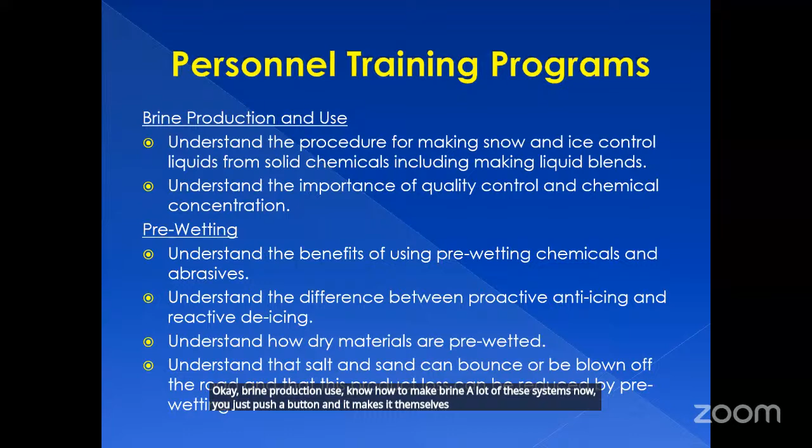Anti-icing. Understand how to fill spreaders and anti-icers with liquid chemicals. Understand the health, safety, and environmental precautions needed when handling liquid chemicals. This is all kinds of stuff—some of it is clearly related to water pollution, but others are just information that would be useful to you.

Road salt in the environment—understand how harmful it can be to vegetation, how damaging it can be to aquatic life, and why it's so important to make sure you put down the right amount of chemical at the right time and in the right place. So many agencies have this zero-tolerance approach, and it's bombs away, and that's why you see the roads white with salt, the shoulders covered with salt.

I used to joke when I did presentations for Rutgers University that we're sending our sweepers out on these roadways to sweep the shoulders, and we'll have enough salt to get through the entire winter. I was joking, but there's a lot of salt out there that just bombs away and never gets a chance to go into solution.

So picture this: if you had a glass filled half with salt and half with water, and you stirred it, how long would it take for all that salt to dissolve? The answer would be never. It would go on, you'd stir forever, because once a solution reaches its saturation point, none of that other salt can go into solution.

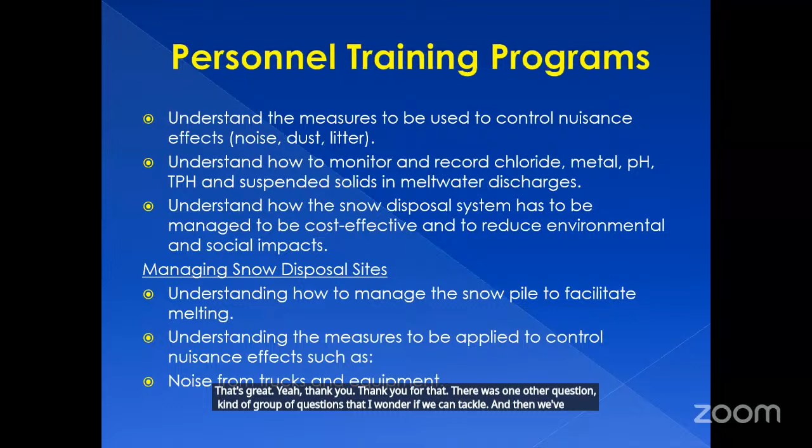There was one other group of questions related to the cost benefit, trying to explain to your municipality that it's worth it to explore these smart salting strategies. The question was: do you have any hard data to show this is how much we can save, and how long it would take to get our money back for these investments? I think you had some of that information in your slides.

What a great question. I went through that exact process. When I came to Hamilton and became director of public works, and wanted to bring things like brining and other improvements to the town, I prepared a cost benefit analysis justifying this stuff and presented it to council. I got a lot of negative feedback, but in the end I convinced them we could do a two-year payback, that the system would pay for itself in two years. I never want to say something that's not true, and the system actually paid for itself the very first year.

This was with a brine making system, and there's money that a lot of people don't even think about. When towns buy trucks and things like that, they'll put things out to bid, estimate how much it is, and have money available to buy the truck, but then the bids come in lower than expected. So there's usually money sitting there that you can get and take. That's what we did in Hamilton, we took that excess money and did all the work we wanted, updating our equipment, getting a brine making system put in, and equipping our trucks with brine tanks and stuff like that. So there's all kinds of ways to do things, there's money, you just have to look for it in the right spots.